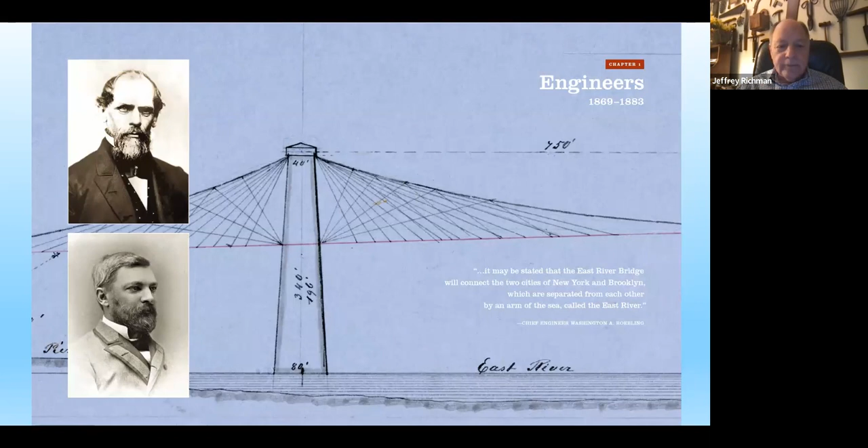And then we broke it down: engineers, workers, caissons, the various stages of the bridge, some of which, of course, were occurring simultaneously. And so here are the chapters, and we go first to the engineers of the bridge, John Roebling and Washington Roebling in succession, the chief engineers.

And so here is John Roebling, trained in Germany, studied engineering, studied philosophy with Hegel, decided fairly early in his life that he needed to get out of Germany, and that America was the land of opportunity where people could do great things without the bureaucracies of Germany.

And so he went and founded, as Lynn said, a town that would become Saxonburg, Pennsylvania, in Western Pennsylvania, and declared himself a farmer, having had no experience whatsoever doing that.

And after about a year, decided that he had made something of a mistake, that he was bored farming, that he would leave the farming to his wife, and he would get into wire rope manufacture.

And so he had read in European journals about this new idea of wire rope. And he tried it out on a canal, and then tried it out on aqueducts, and then tried it out on suspension bridges, and Roebling and Sons became the leading wire rope manufacturer in the world.

And he also became the leading suspension bridge builder in the world. And so we'll trace his history a bit, but you should understand that suspension bridges were being built in Europe, they were being built in the United States, and they were collapsing in Europe and the United States.

Charles Ellet got the contract over Roebling to build the West Virginia Bridge, and that bridge collapsed. John Roebling never had a bridge of his collapse.

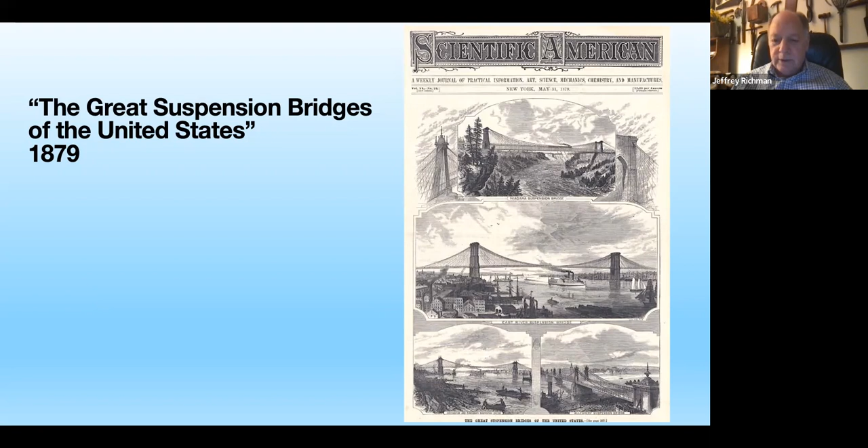So here is the first, the Niagara Bridge, built between 1851 and 1855, an interesting construction because it was the first suspension bridge to have a railroad go across it. And it was a 2-tiered bridge also. So you see the railroad locomotive here, but you also had below it a carriage and pedestrian area that people could cross on.

And I do love quoting Mark Twain at every opportunity. And so Twain talked about this bridge: 'You drive over the suspension bridge and divide your misery between the chances of smashing down 200 feet into the river below and the chances of having a railway train overhead smashing down onto you. Either possibility is discomforting taken by itself, but mixed together, they amount in the aggregate to positive unhappiness.'

And so, of course, the key here was that the bridge went up. It spanned this gorge that was otherwise impassable or difficult to pass, and it stayed up.

So here is an anaglyph. We had anaglyphs made from stereo views of the bridge, which with 3D glasses like these, you can see in 3 dimensions. There are 44 of these in the book, which allow you to get a "you are there" experience.

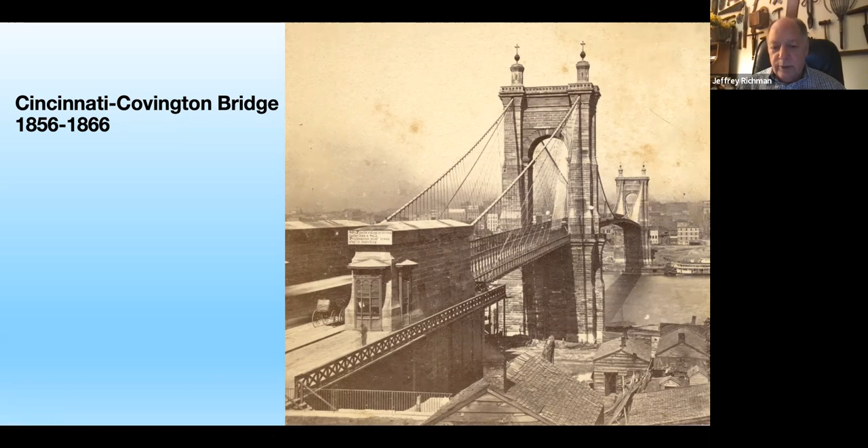So here we are, 1856 to 1866, the Cincinnati Covington Bridge across the Ohio River. To those of you familiar with the Brooklyn Bridge, this is kind of a mini version. It has only 1 arch, whereas the Brooklyn Bridge has 2, has only 2 cables, and is substantially shorter than the Brooklyn Bridge, but certainly is a precursor of what Brooklyn would be.

So John Roebling in 1857 draws this plan for his bridge across the East River. Before they're thinking Brooklyn, this would have been up around the 59th Street Bridge, between Manhattan and Queens, across what is now Roosevelt Island.

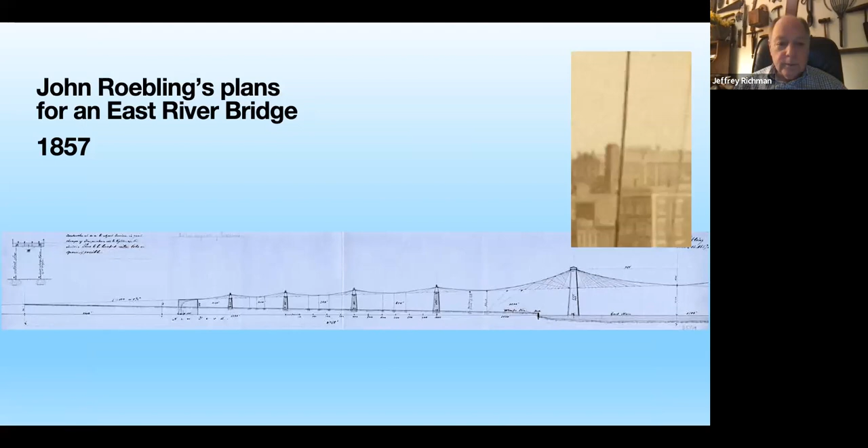And the problem with John Roebling, of course, was that he was on one of these and thought he was out of the way as the Fulton Ferry was coming in to land. And he was not. He got his leg crushed, and sadly, just within weeks, he died a very, very painful death of lockjaw.

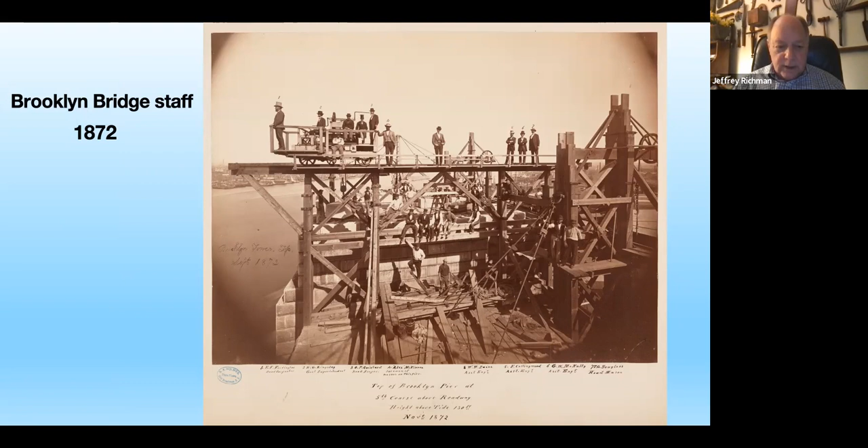And so the staff that supported the construction—this is a wonderful photograph from the Museum of the City of New York, which has a key. As you can see, there are names listed down here, and each of these figures is numbered. Number 2, for instance, is William Kingsley, the general superintendent. Number 3, I believe, is E.F. Farrington, the master mechanic, etc.

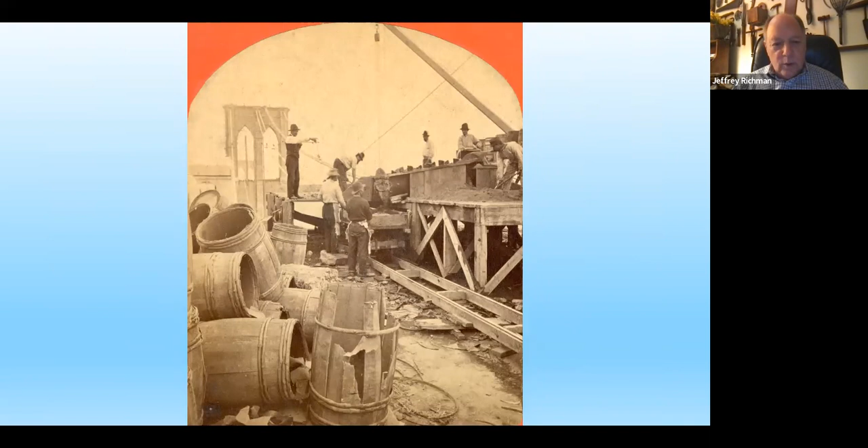And they had quite a turnover, particularly when working in the caissons, which was not a good environment to work in, with compressed air and mud and dirt and water. So you see some of the photographs. This is a wonderful half stereo view of workers on the bridge, wonderful in 3D, because the photographer understood that to get a good 3D effect, you needed something in the foreground, something in the midground, and something in the distance. That's exactly what he did here. And so here's an anaglyph that can be seen with 3D glasses if you have them—workers doing brickwork on the approaches to the bridge, and the anaglyph of that.

And so these were built by shipbuilders on ways, ready to be launched. And before you would launch them and position them, you needed to have an idea of what you were going to hit as you dug down. So the idea was to dig these down, plunge these boxes into the ground slowly, and then build the tower of the bridge on top by laying one block of stone at a time—either limestone for the lower areas that were going to be in the water, or granite up above.

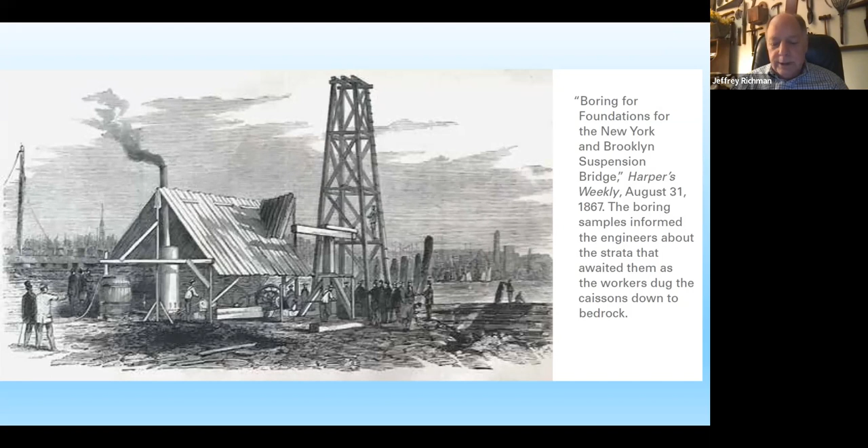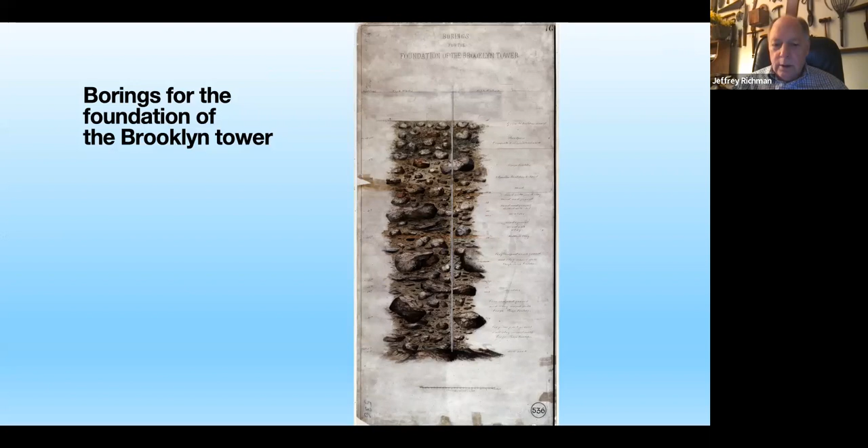And so here they are taking sample borings, and here, the borings for the foundation of the Brooklyn Tower. This is just a beautiful drawing of what they were about to encounter. Here you see a detail showing smaller boulders and sand and gravel, boulders, etc., so they had an idea of what they expected to hit at 32 feet, and down at 42 feet. Ultimately they plunged these down—these were the largest man-made things that had ever been dug into the ground in the history of the world.

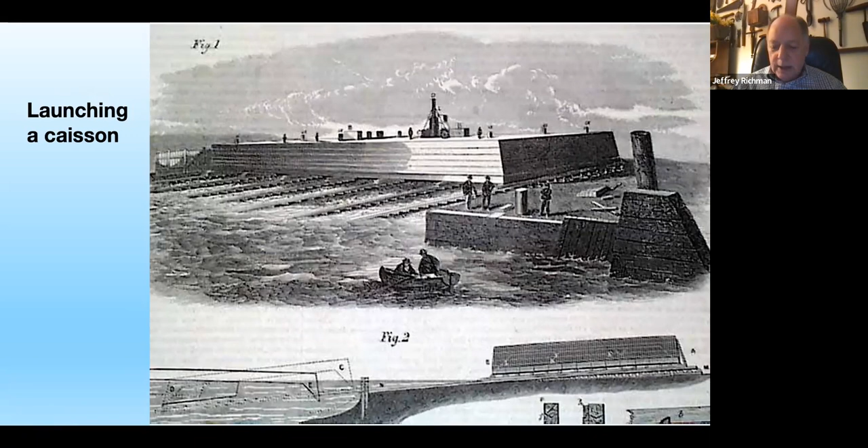So here we see on the East River, built by a shipbuilding company, Webb and Bell, and about to be launched. You can see here the angle at which it's going to come down into the river. Some predicted that as soon as it hit the water, it was going to sink to the bottom of the East River. Washington Roebling had his calculations, and his calculations were very much vindicated.

And so here at Greenwood Cemetery, Eckford Webb, shipbuilder—a wonderful granite monument. This is the front of the monument. He had built some of the largest ships in the world in this era. And yet, when he writes his epitaph, he writes 'an eminent shipbuilder and constructor of the caissons for the first Brooklyn suspension bridge.' So that was the proudest accomplishment of his life.

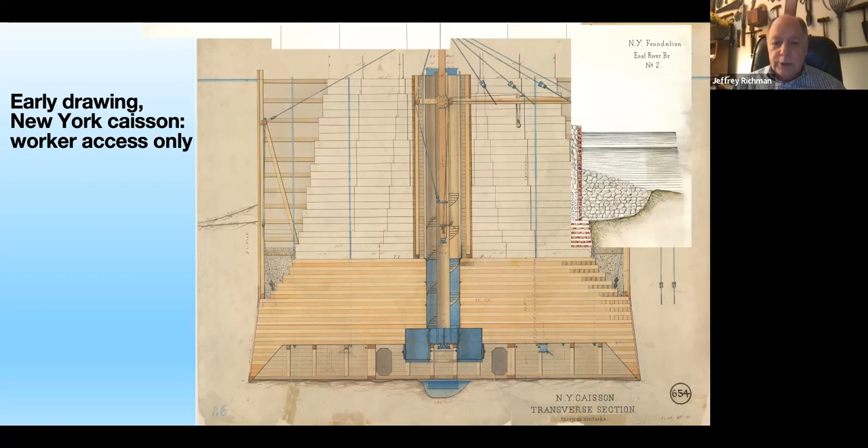This was really a preliminary thought. John Roebling was the planner of the bridge, but Washington Roebling had to modify the plans substantially and improve on them. You see Washington Roebling's plans, which included water shafts to allow for removal of the debris the men down below had loosened, supply shafts used to drop bricks and concrete down to fill the space once they'd reached the digging depth, and an air shaft that let compressed air down to keep pressure on the water and keep it out to the extent possible.

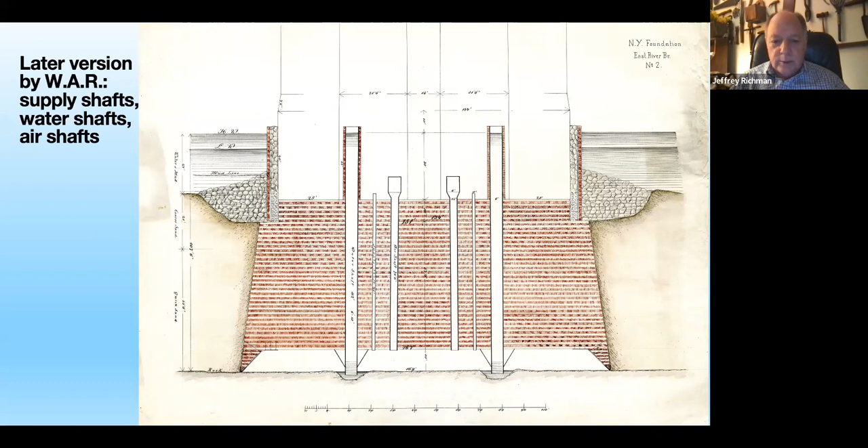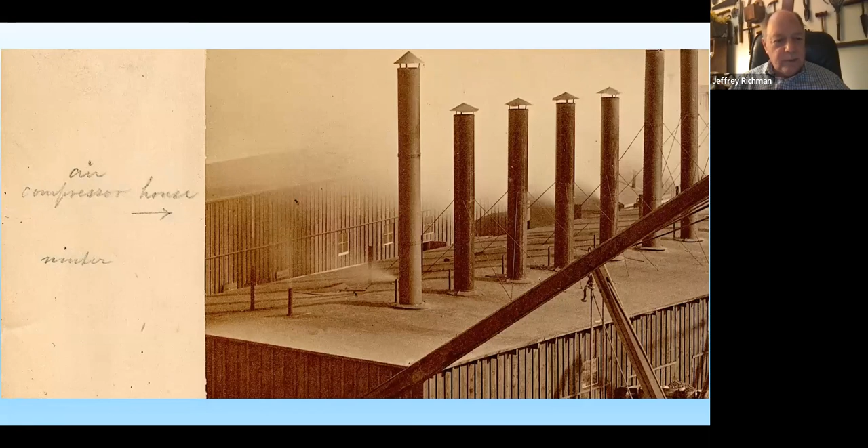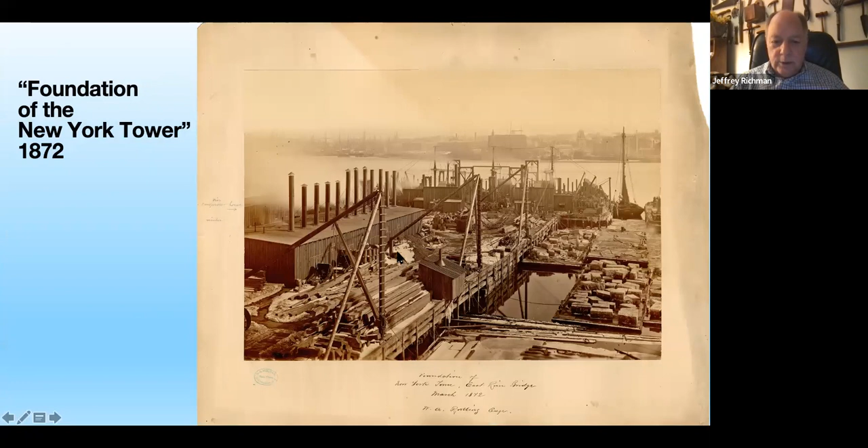Then you see these stacks here, which are for the air compressors, the pumps compressing the air and blowing it into the caisson through hoses. We know this is the air compressor because you can barely make out handwriting here, but with a close-up we see 'air compressor house,' and it says 'winter.' Erica Wagner, who was tremendously helpful with this book, is an expert on all things Washington Roebling, including his handwriting, and she confirmed that is, in fact, his handwriting. You can see, going back, that this is winter, and you see the snow on the pier here.

There was an airlock to keep the compressed air in that the men had to go through. Unfortunately, they did not quite understand the bends and how slow decompression was the key to avoiding them. As the caisson was dug farther and farther down into the ground, that became an increasing problem, and they started to have workers die as a result of the bends.

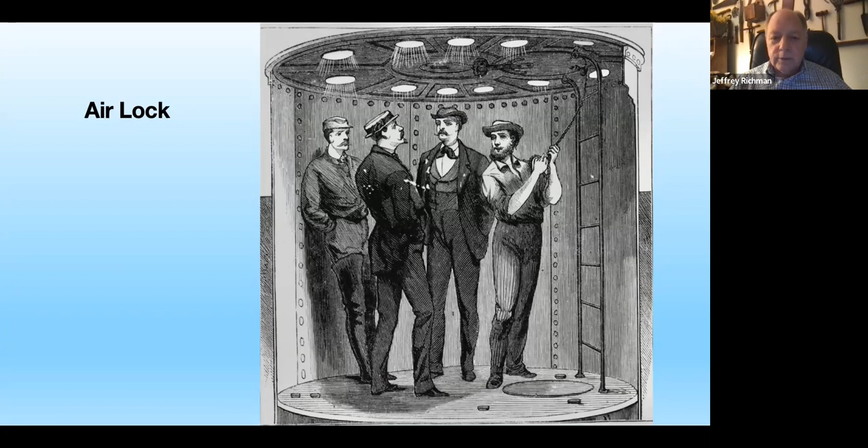Here we are breaking up boulders. This became a very tedious and slow operation, to the extent that Washington Roebling went into the caisson as the work was being done with a revolver and black powder, experimenting with larger and larger charges to see if it impacted the compressed air environment and the nearby workers. He discovered it had no impact, and they were then able to blow these boulders apart and save a tremendous amount of construction time.

So moving debris in wheelbarrows, they would dump it at the bottom of the supply shaft, into this pool down here. But they soon discovered the problem with the pool was that this debris wanted to harden, so they needed to blast water into the pool to keep it liquid.

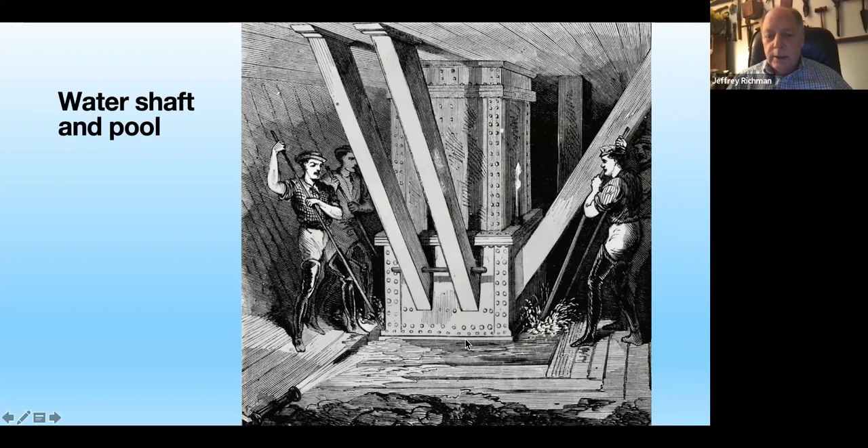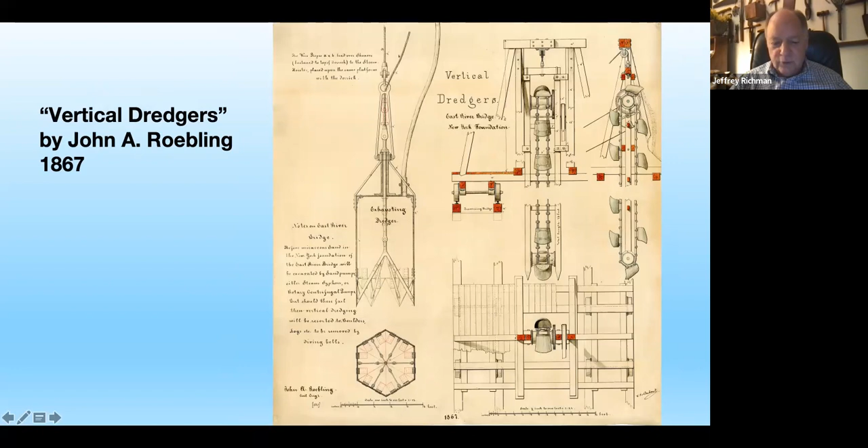They assigned men with long iron bars to mix the debris and water down there so that the clamshell bucket, which we'll see in a moment, could come down through the shaft, grab the material, and lift it back up. There was a tricky thing going on. These dredgers were designed by John A. Roebling, and some wonderful drawings are included in the book showing the clamshells. These clamshells went down through a water column, which kept the compressed air in. Had there not been that water column, the compressed air could have just blown right out of the shaft.

The trick was they had to keep the compressed air in with a column of water high enough to balance off the compressed air, but at the same time not too heavy that it would flow into the caisson and the work area. So that was a calculation they had to do.

I do enjoy this fellow right here. According to a historian and engineer I consulted with on this book, his job was to signal to the steam operator who was lifting and lowering the clamshell when it was at the perfect height to stop operation. He would just wave, stop lowering it, and that was the mechanism they used.

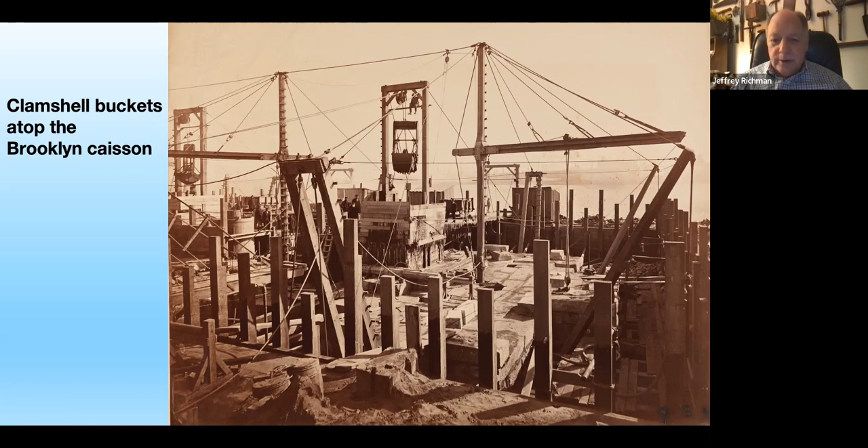So this bridge is cutting edge in a lot of ways. It's cutting edge in its use of steel, in the massiveness of the bridge, and in the use of electricity—the first time electricity was used across a river. But it is very primitive in terms of these wooden boxes and in terms of somebody just signaling to the steam engine operator to stop the steam engine.

Let me go back for a second. Here you get a closer view of that clamshell with this mechanism for lowering it down. Washington Roebling experimented with all sorts of layouts for the teeth on the bucket and ultimately decided on steel teeth. They very much tortured him—those teeth were breaking off all the time. They had 5 or 6 of these buckets, and 3 or 4 of them were out of commission at any one time because the steel had broken, since the boulders they were dealing with were so difficult.

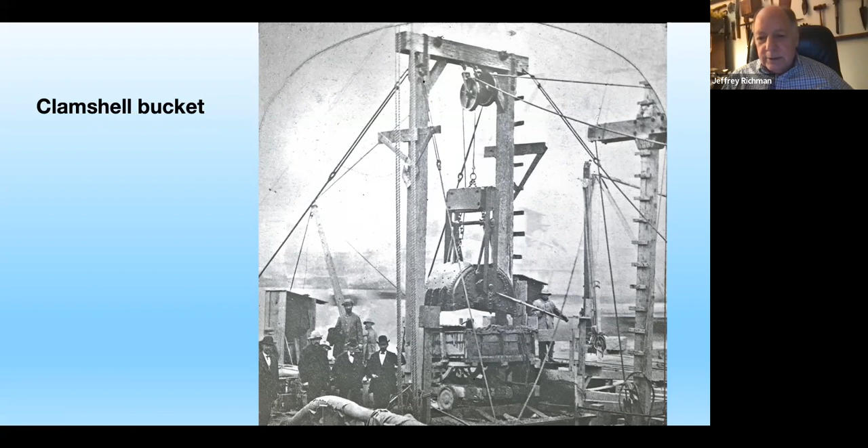You see how they have opened this clamshell and dropped the debris into this car, which they would then roll by rail over to the edge of the caisson and just dump it into the river, then come back and dredge it out of the river.

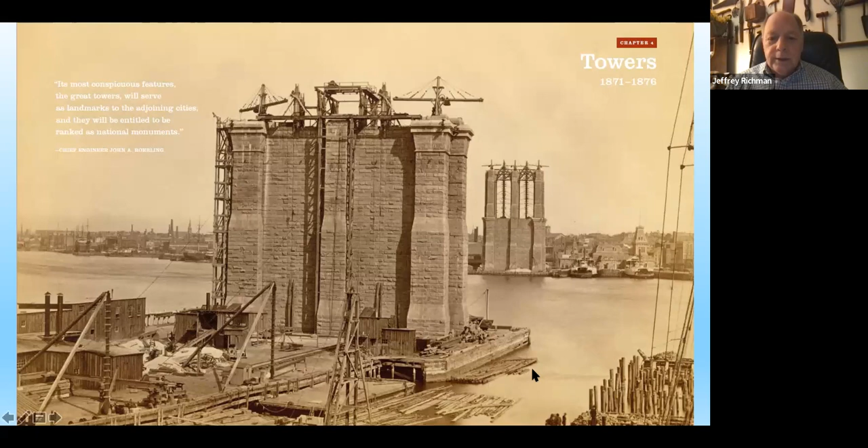All right, so now we're into the towers. We can see that we're on the Brooklyn side because the tower on the Brooklyn side is substantially higher.

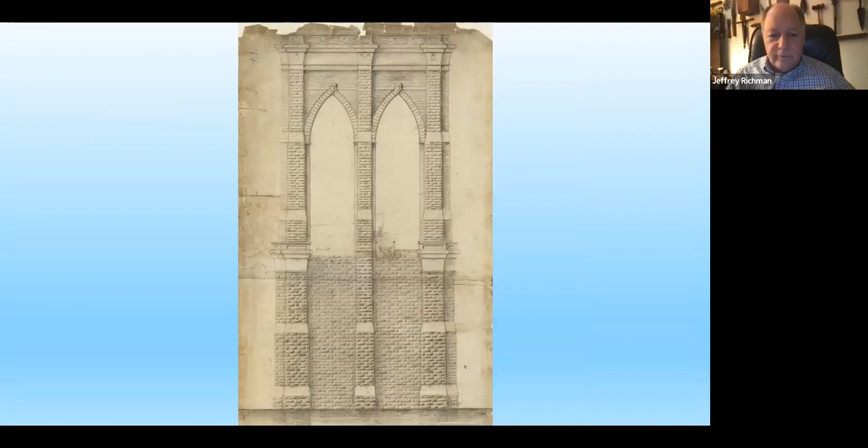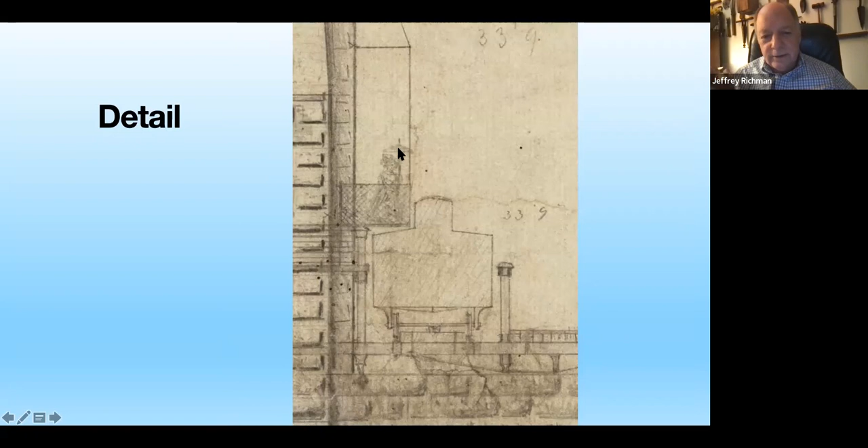Here's just a wonderful detail. Some of these draftsmen obviously decided they wanted to have some fun. If we go back for a second, you can see something indecipherable here, but when we close in on it, we see there's this woman with a parasol standing here for no reason other than someone wanted to draw a woman with a parasol.

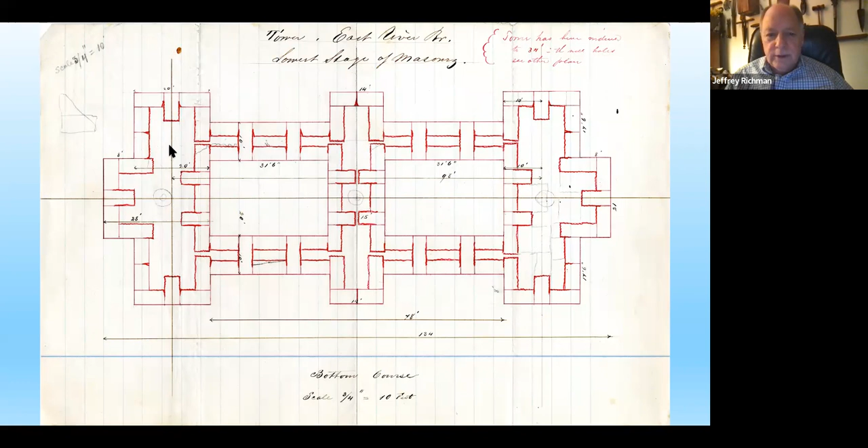The diagram by Washington Roebling of the towers, looking from above, shows how the stones would be laid out. You see here that there were these empty spots in the tower, which remain to this day. That was to save on materials—he had calculated that it was unnecessary to put stone in here. So these are just hollow right through, as are substantial parts of the anchorages.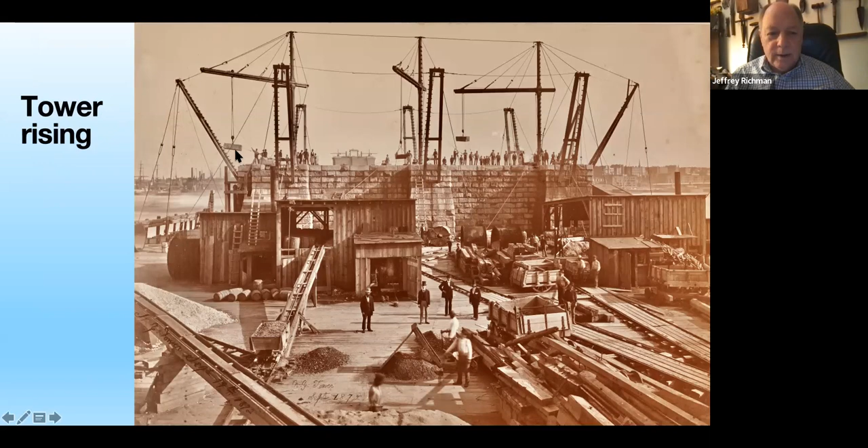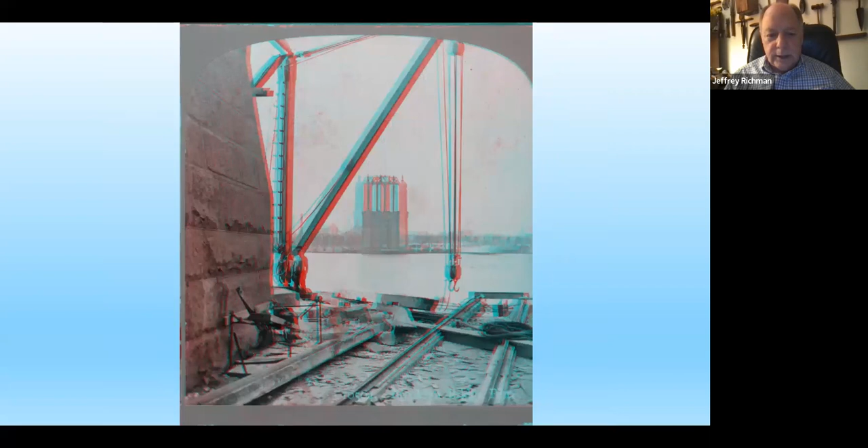Here is the tower growing up, a wonderful photograph by a photographer who certainly had some sort of in with the bridge, to be able to get these guys to pose and put down their work, and even get the workers to hang these granite blocks to add a little drama to the photographs. So here's the New York Tower with Manhattan in the background—you can see how it really rose above New York City and dominated the skyline. Here we are from Brooklyn looking towards Manhattan, in a 3D Anaglyph, with Brooklyn even lower than Manhattan in terms of the heights of the typical buildings.

Now we go to the anchorages. These were needed to fasten the cables down, the ends of the cables. You see the 4 cables—1, 2, 3, 4—going into the anchorages. This was a mass of granite, a tremendous weight that would hold the ends of the cables.

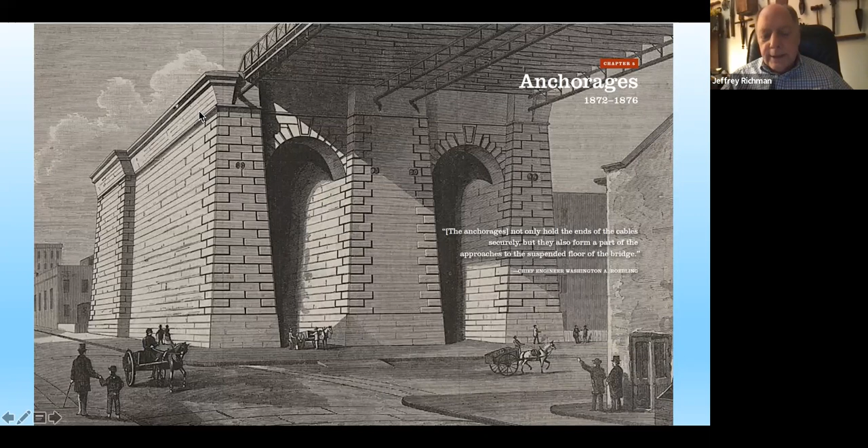This is a drawing showing the cables coming through the anchor chain down to the anchor plate, and then they massed granite around these pieces of steel to hold them in place. Washington Roebling observed that in Europe they made these anchor chains accessible so that maintenance and repairs could be done.

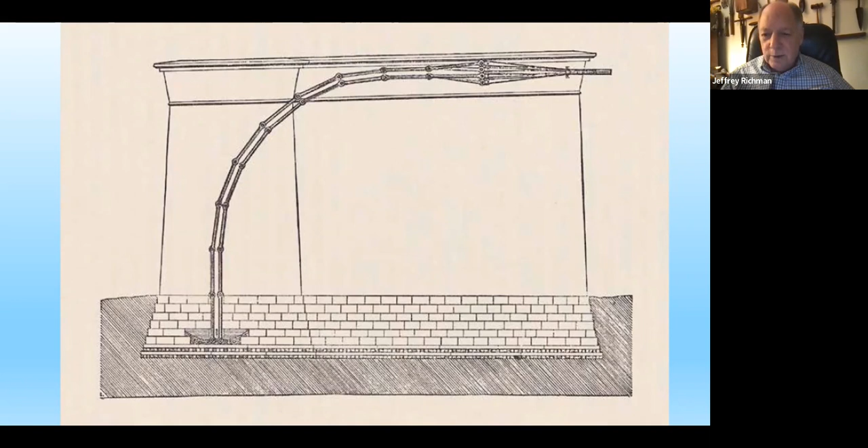He noted that Americans were impatient people who would not want to do maintenance on his bridge. So he just built it into the stone and called it a day, and it has worked fine. It has not deteriorated whatsoever.

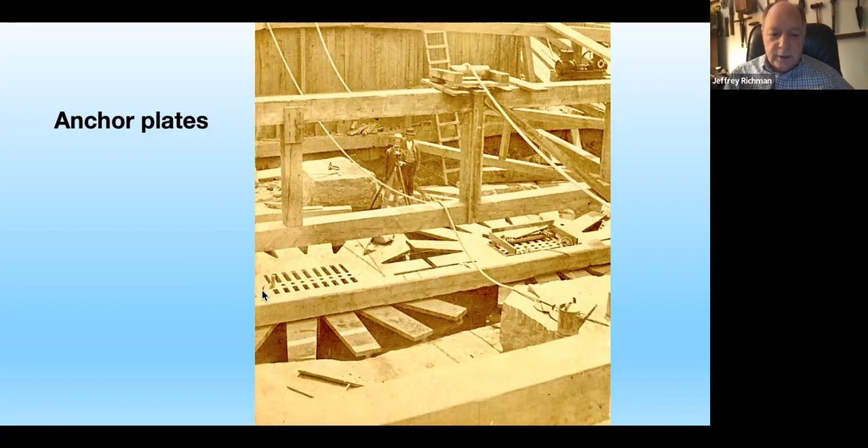Then the footbridge. The footbridge was quite a phenomenon because it was put in place to allow the workers to climb up and observe the spinning of the cable wires. They actually spun the wires in place. Each wire was about the thickness of a pencil, close to 300 wires per strand and 19 strands per cable.

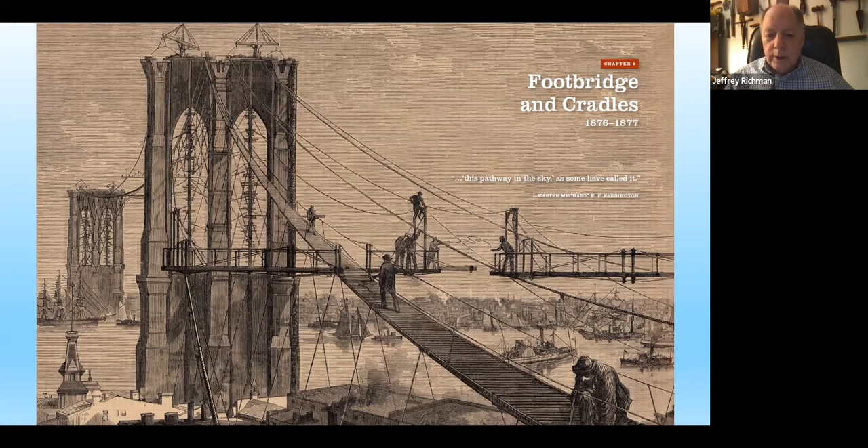It was 13,000 miles of wire that went into the cables of the Brooklyn Bridge. The purpose of the footbridge was to allow the workers to reach the various parts of the bridge, and at the same time to stand on these cradles and observe the wires, making sure that each wire was in the same tension as the wires around it. Here you see those cradles up in here, 1, 2, 3. There's one all the way over here, and there's one off screen over here.

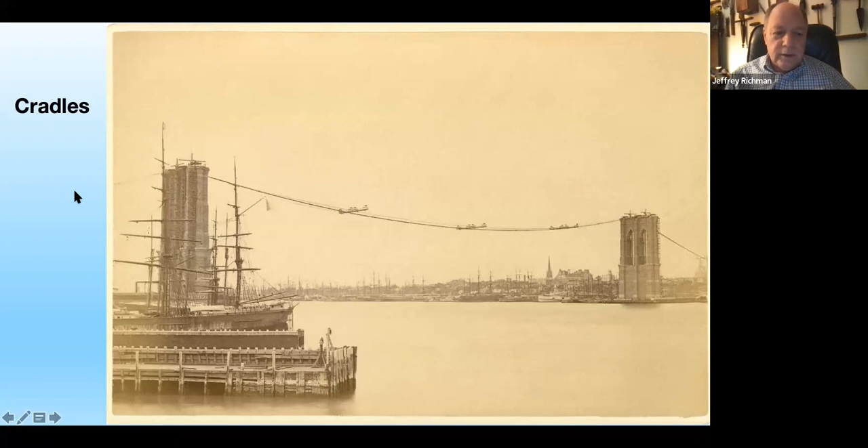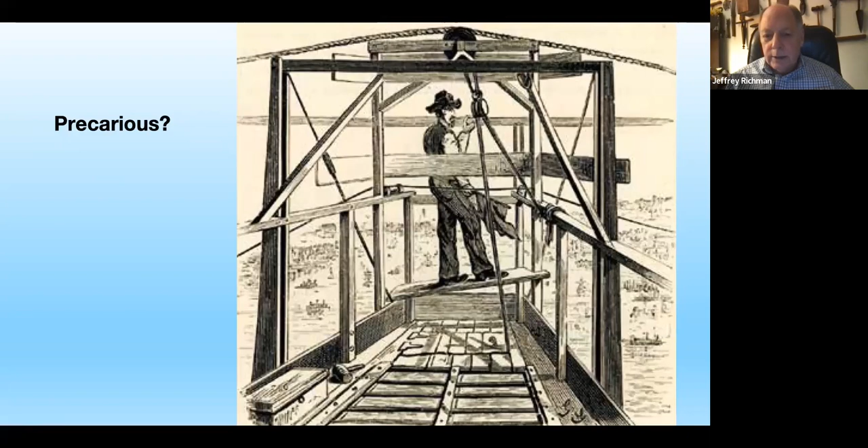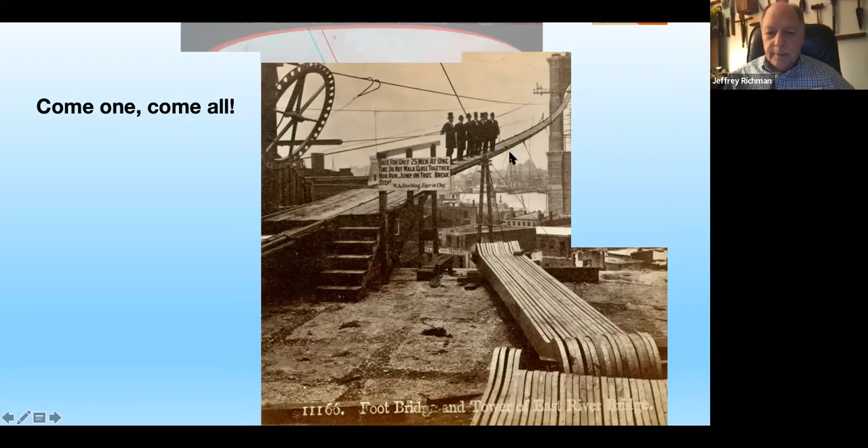Here we see the shed in which the wires were kept and played out. Here's the footbridge. One of the elements of the footbridge was that these slats were separated to allow the wind to come between them. That made it all the more difficult for people who managed to wangle their way up onto the footbridge when they looked down and saw how high up they were. One of the workers on the bridge noted that he felt women did a better job of crossing this footbridge than men did, but it was primarily open to the public.

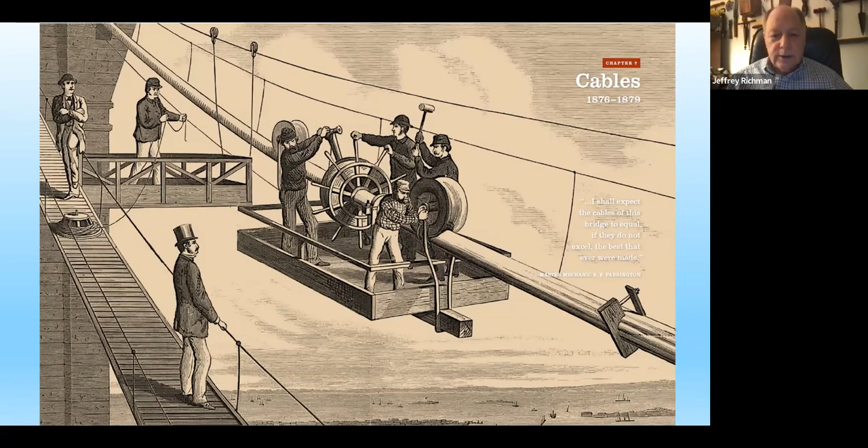Then they wrapped the wires with a galvanized zinc wire. This was one of the buggies, and they had buggies coming down from each of the towers in different directions, and this has been key to protecting the steel of the cables. E.F. Farrington, the master mechanic, wanted to show his men that it was safe to be up above the East River on these wires, so he was the first to really cross the bridge on the first wire.

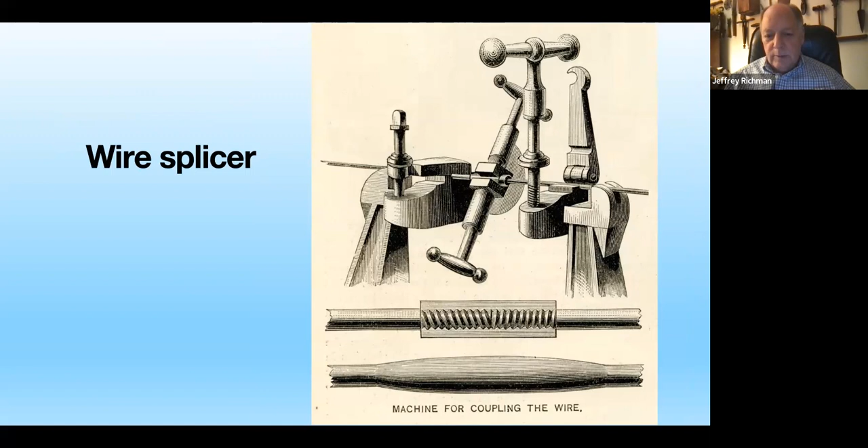The carrier was used to pull the wire across the bridge, and then they spliced wires. They could only get 800 feet on a wire, so they had to splice many, many times, and this was an ingenious device for doing that.

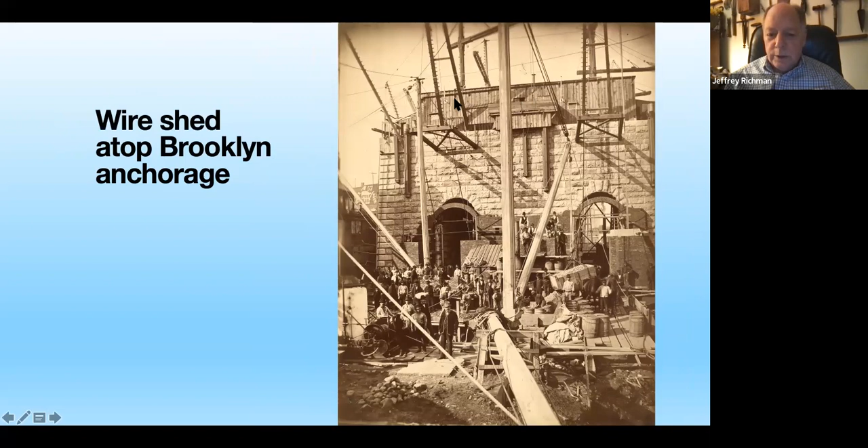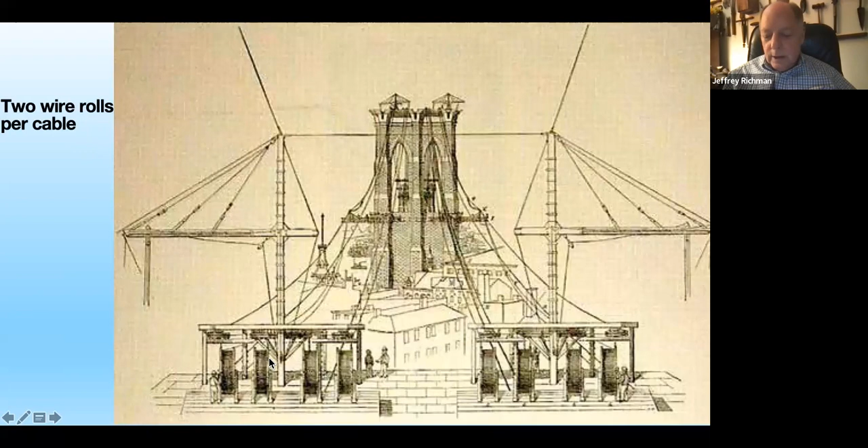Here you see the wire shed up on top of the Brooklyn Anchorage, only one wire shed. Looking down, we see the wire shed again. Here, an artist has removed the shed so that you can see two wire spools dedicated to each of the cables. Here's the connection of the anchor bars that went down into the anchorage and the strands of the wires that go off towards the tower.

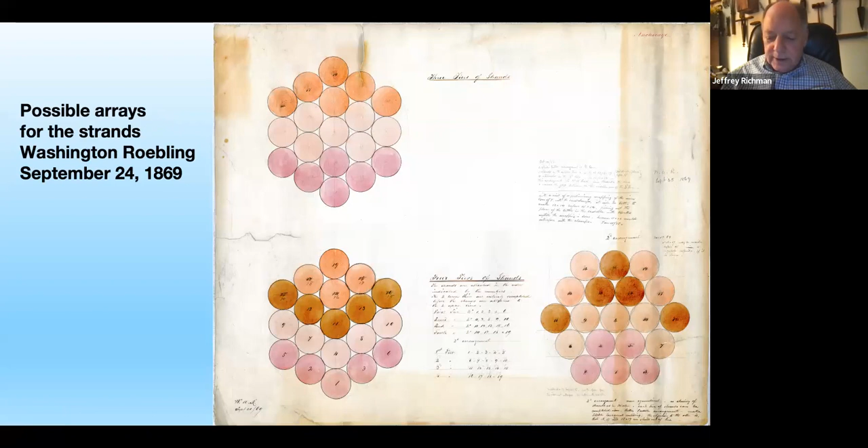This is Washington Roebling positing various layouts for the strands. Here's a closer look. Strand number 1 was going to go down in here, and then 2 and 3, etc. You can see he's constantly changing this, so this 14 becomes 16, etc.

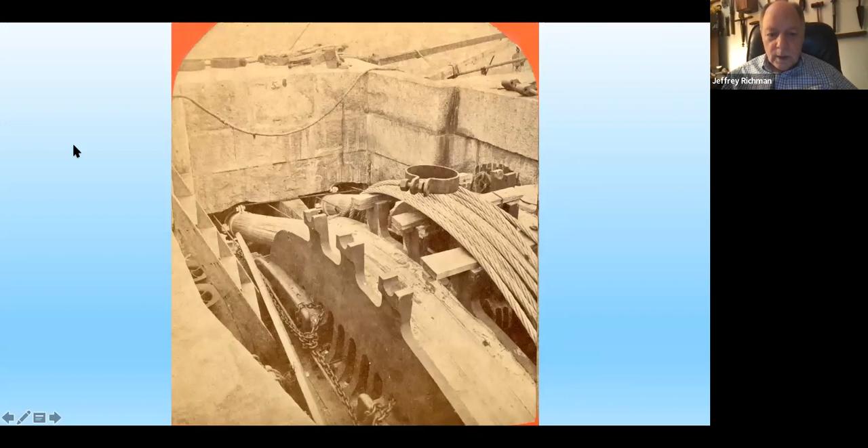One of my favorite photographs, this is a lantern slide from my own collection showing the four cables. Here you see this cable has been clamped, this cable has been clamped, but this one you see the strands unclamped as they are over here. We're looking towards New York, the Tribune building, and the United States Post Office, with the saddles and the strands atop the towers.

Then, as I said, wrapping the cables, working through the winter. The approaches were necessary to run from the anchorages down to the street, and they had to be of a sufficiently gentle level or grade to allow people and horses to get up and over the bridge. So they extended substantially into Brooklyn and substantially into Manhattan, just short of City Hall.

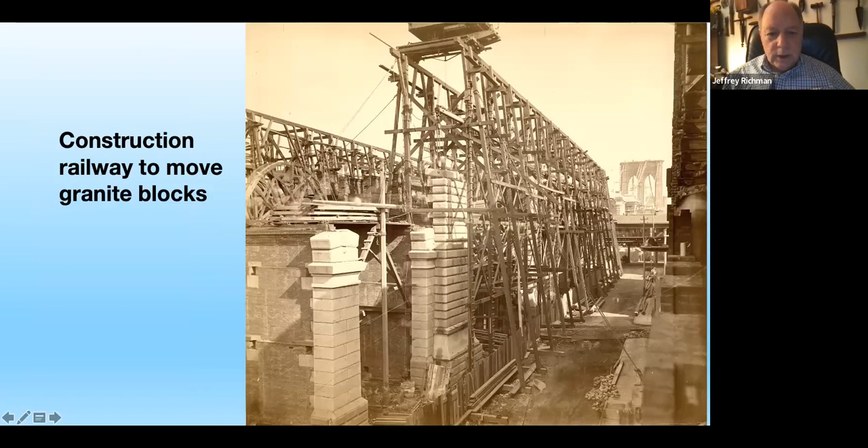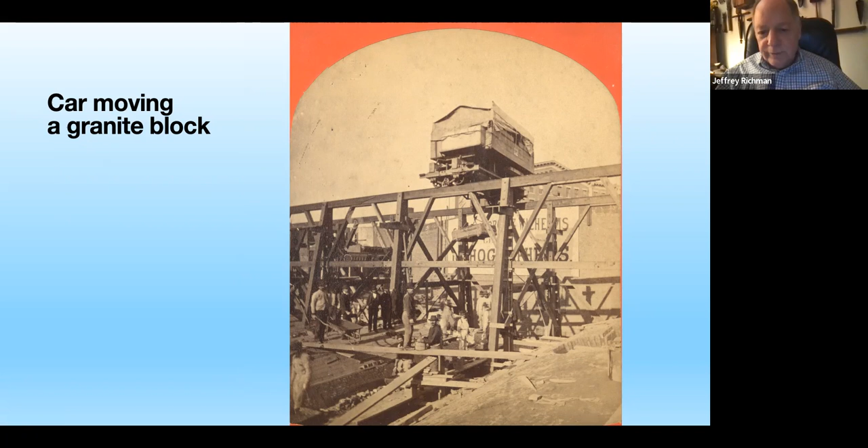They also constructed this wooden railway to move materials around. If you look all the way up here, you can see there's a car that they used. Here's the approach as it was being built, and here's that car that could move along and carry materials from one end of the construction site to the other. So if you needed a granite block near the New York Tower, you could move it on this railway. We have some wonderful images of that.

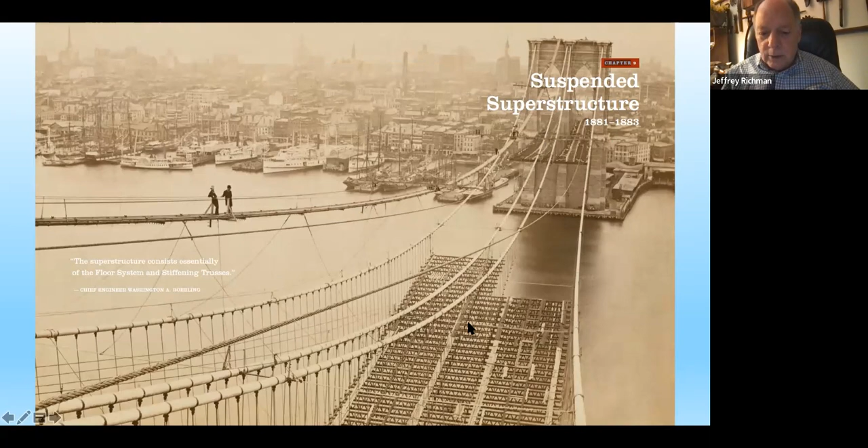The suspended superstructure—they built out from the tower. As you can see, the deck coming out from the New York Tower as it came out also from the other side, from the Brooklyn Tower.

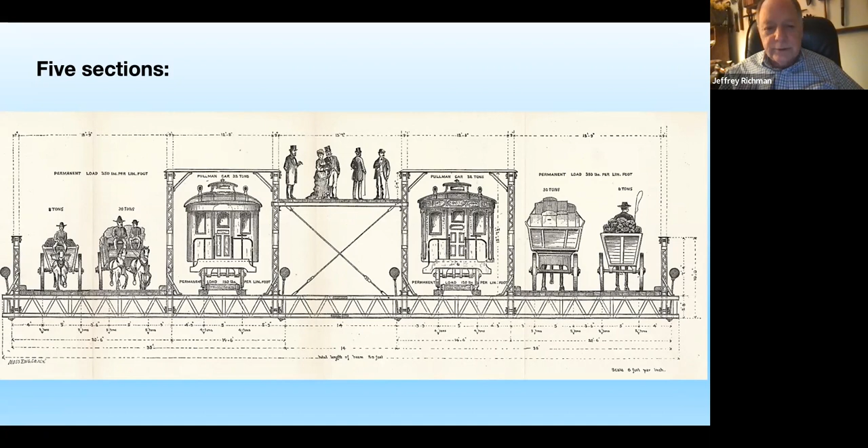The idea was to divide the deck into five pieces: an outside two-lane carriage coming from Brooklyn to New York, another in the other direction, a railway for transporting passengers from one end of the bridge to the other, and an elevated promenade, which had no precedent, but which John Roebling had planned, and Washington Roebling made sure happened, to allow people of leisure and invalids to walk the bridge and enjoy the magnificent views and fresh air coming off the harbor.

So here we are attaching the suspenders. Those again are the wires hanging down to which the beams of the deck are attached.

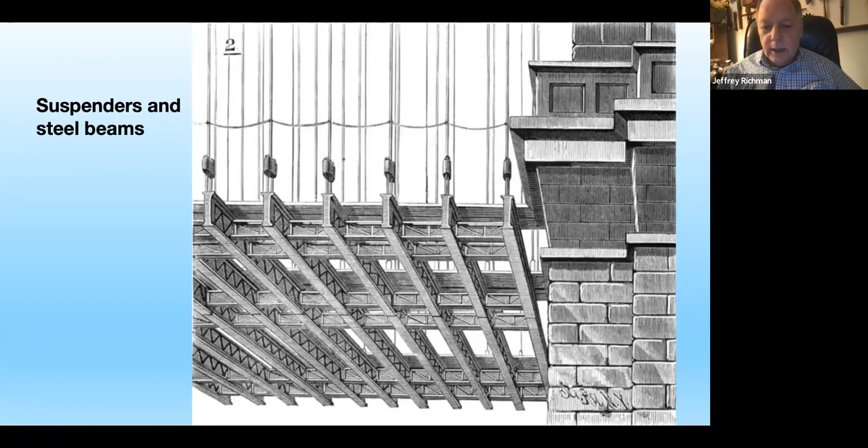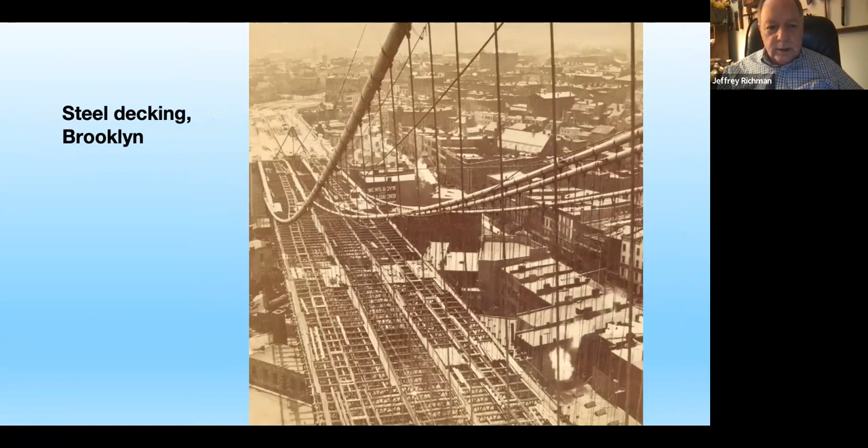The bridge was 85 feet across. John Roebling was pretty thrilled that the bridge was going to be as wide as Broadway in Manhattan. Here you see the deck proceeding with several of the assistant engineers, and the deck going into Brooklyn.

Assistant engineer William Paine was an expert in cable cars. He had built cable cars out in San Francisco, and built cable cars in Denver and Cleveland. So they decided that they would use cable cars, which would allow them to avoid the massive weight of a steam locomotive.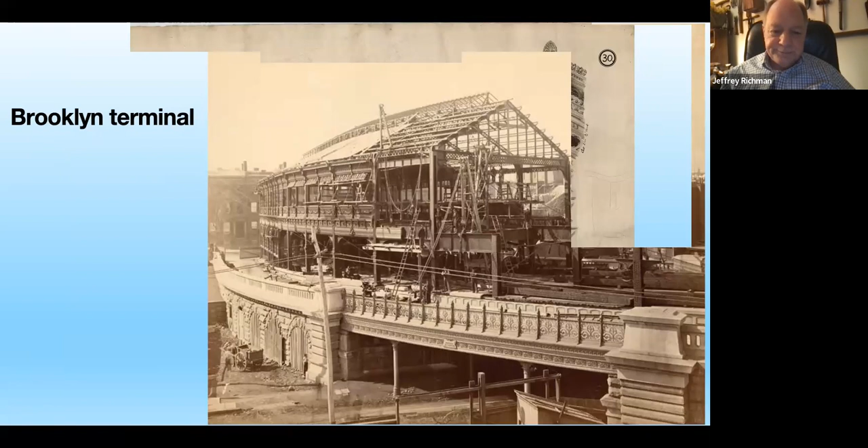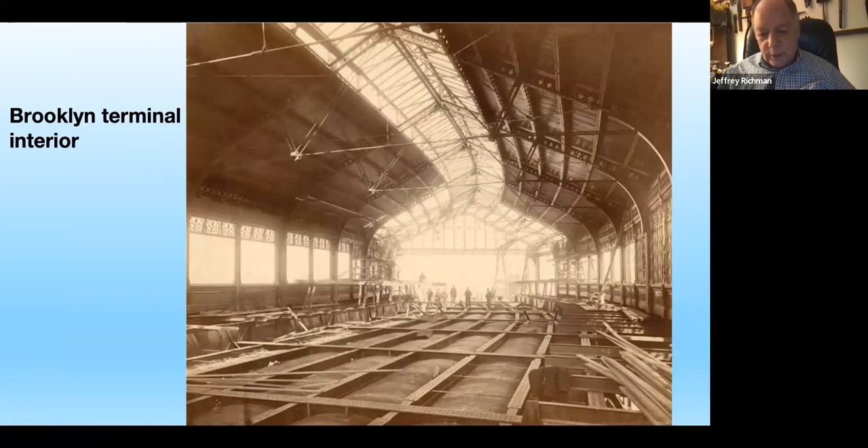So here are the terminals that they were building at the two ends of the bridge. This is the Brooklyn terminal, close to completion. Inside the Brooklyn terminal, you see that bend, which is typical of the Brooklyn terminal—it did not occur on the Manhattan side, which was a straight terminal.

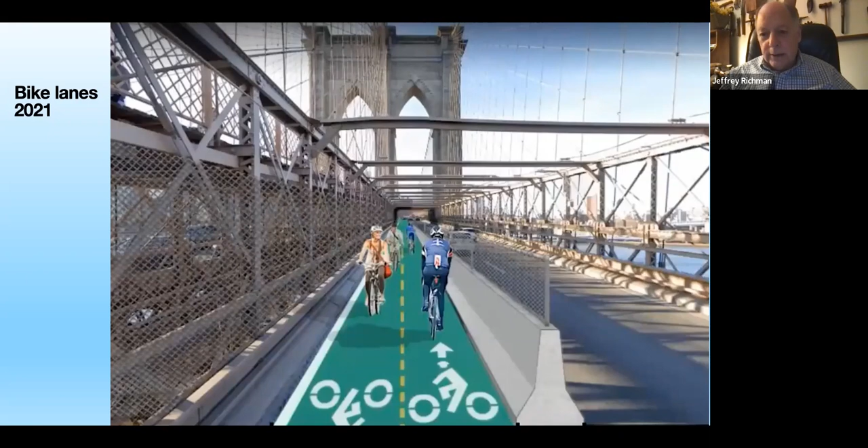They had added trolleys and taken out one of the carriage lanes. The bridge has evolved over time so that in the 1950s, when the automobile was ascendant, three lanes were created in each direction. The bridge was reinforced to some extent, and the trolley was taken out. Then the latest development is the bike lane across the bridge—they've taken out an automobile lane with bikes now ascendant. What's particularly wonderful from my perspective is that they've taken the bikes off the elevated promenade, and it is now strictly pedestrians, a much, much better experience.